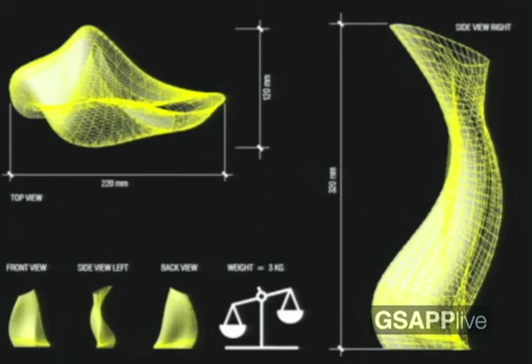With this competition, I was actually told that I had won, but apparently the CEO of Budweiser said it didn't look African enough. I found that quite interesting, that he knew more about an African aesthetic than I did. The winning trophy was actually a drum, very clever, and unfortunately it was never manufactured.

But I thought it would be an interesting way to show you how that notion of aesthetics works, and also how one can question the fundamentals of what is a trophy and try to articulate something different.

And in terms of a jump in scale, a lot of my work, as Marcus mentioned, works beyond the architectural scale. I get involved with institutional structures, essentially establishing organizations, because in South Africa we're at the beginnings of our democracy, so the type of conditions which allow for architecture to emerge are often not there.

This particular project, I was asked to do some eco-lodges using local materials in a very sensitive forest, but quite importantly, we had to use homeless people to actually build the building. So the notion of having strong intellectual capital and how you detail the buildings becomes transformed when you realize you're dealing with people who've never even held a piece of wood before.

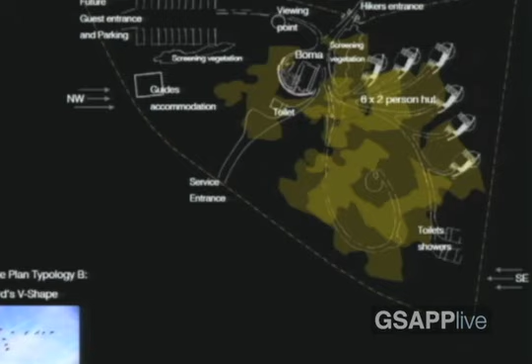So the exercise here, in part, is responding to context, to wind and so on, but I think the real hypothesis and journey is what type of architectural language is appropriate when the people making buildings are at almost zero skill level. This had various implications for the language of the building.

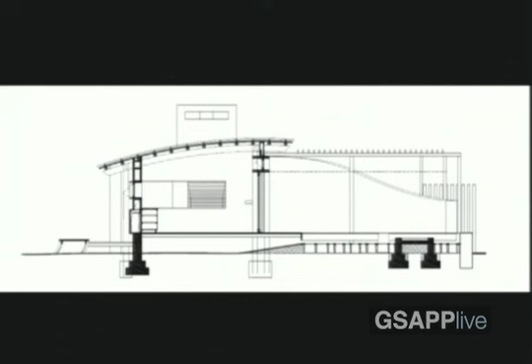The fact that I had to use found materials off-site to actually construct the building meant there wasn't the luxury of me using the sort of typical materials that one would expect.

But I think what was very successful about the project - and that stone wall, by the way, we had to demolish it three times to teach people how to put a stone wall together - it seamlessly fits into its context, and there were sensitive trees that had to be avoided.

So the design methodology of this project was very much one of sensitivity, one of calm.

And I'm quite proud to say that through this project, we trained almost 60 different homeless people who now know how to make a door, who now know how to make a window, and they're able to take those skills elsewhere. So the impact of this project is less about its form and more about its mode of becoming.

My next project is a police station, my first enclosed building, which won an award. I'll tell you why. The police, for various historical reasons, have occupied a very contentious space in South Africa's history. They were often involved as an instrument of the state to repress people. They were not trusted by anybody, and even I, to this day, still have a shiver down my spine when I see police walking down the street, regardless of their nationality.

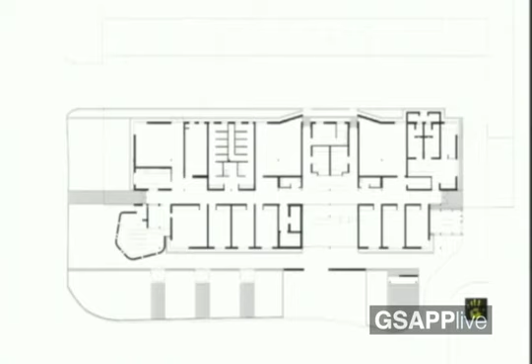Now, this sounds pretty simple. Up until this point, police stations had slot windows so that you could fire out of them. They had brown brick walls so that you can't actually see the dirt on them. Very defensive strategies, and in fact, all of their buildings were fortresses in the landscape. And I said that this building will actually be fragile.

So I'm actually going to make it white so that if dirt shows up, it encourages you to clean it. Second, I'm going to remove all of the burglar bars, which they had on all of the windows, and I would have no fence at the front side. Essentially, I would turn the inside of the station outward and make it a public sort of building.

The success of this project is that it has now informed the national strategy for how all police stations should interact with their setting. Not necessarily the form of the building per se, but really that police stations can become part of their context and can afford to be ephemeral, and in that way show strength, as opposed to showing strength by having a fortress-like sort of architecture.

The staff in this building have loved it. I go there and visit it often. But one of the most intriguing things was when I was dealing with the police superintendent and I was putting in hand-screw taps and so on in the bathrooms.

The police superintendent said, 'Don't give the police nice things. They will destroy them. They're all animals.' And I said, if you treat your own staff like animals, then they will behave like that. Not only that, they will go out into the world and take it out on ordinary people. So I said, let's make a building which brings dignity to the police, because they are a part of our society and they need to see themselves in a different light.

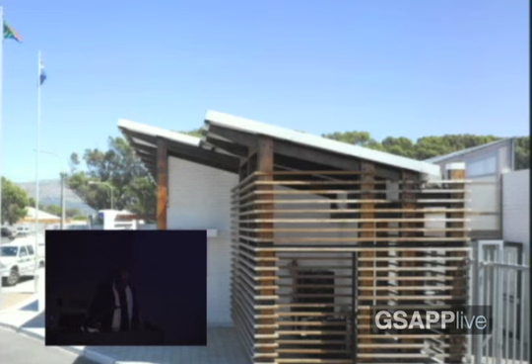This building is a fairly ordinary sort of architectural language, but I think it's quite a departure from the normative way buildings were designed. In fact, people have said to me it looks like an art gallery, it looks like anything else. And I said, well, I'm pleased that the one thing it doesn't look like is the stereotypical image of what a police station needs to be.

The little curved end over there was a smoker's corner and a barbecue facility, a sort of place where the police would get to rest. At the time, there seemed to be no necessity for this, but it's one of the most successful and simple spaces in the whole project. And when last I checked, police persons have been arguing quite a bit to try and be relocated to that particular station.

Greenpoint Stadium is a project which I submitted as part of a competition. I was shortlisted. What was interesting for me about the stadium, and this was for the World Cup, was its potential in terms of what it could offer society, the local society, that is.

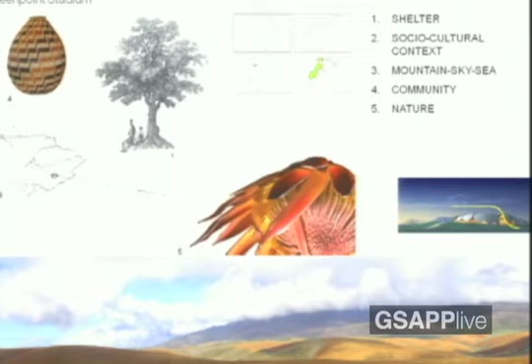What I did is pretty much a hybrid concept. There was a relationship between the notion of a tree providing shelter, again craft in terms of beadwork, but the location in terms of a mountain, sky, sea relationship, and the protea, which is our national flower. The design that I developed, I worked on this with HOK Architects in London, was the notion of a very sort of delicate type of structure.

What was, I think for me, the main purpose of this form is that you'll see the basket at the base. Where the stadium was proposed, there were actually about 5,000 informal traders who used to trade on that site every Sunday, so it was a means of livelihood for them. My urban strategy was to make a stadium around which the informal sector could still find a place.

This opportunity to create infrastructure for 2010 did not mean that we had to displace local people and disrupt the local economy. I was actually quite proud of the design for that social purpose, and for a language of a stadium which doesn't look like a typical stadium. Unfortunately, I didn't win it because I was told the design was too radical.

You might have seen the current stadium, but I'm sorry to say that the 5,000 people who used to trade there no longer trade in that area, and their lives have been disrupted. This relationship between what a building can do for its context and its ethical responsibility in understanding its space economy is lost on a lot of people, and that's a real pity in a place like South Africa where poverty is almost endemic. It's quite important to imagine how architecture can help stave off these sorts of challenges.

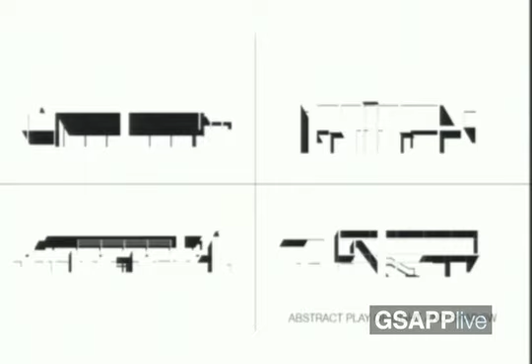So this project started out with a 2 million rand budget, and I made a very strong and impassioned argument about the role of buildings playing a role of legacy and informing the context, and they increased the budget to about 21 million. It's not that I was chasing fees, but it was really about putting enough investment into a building which was meant to transform and support its context.

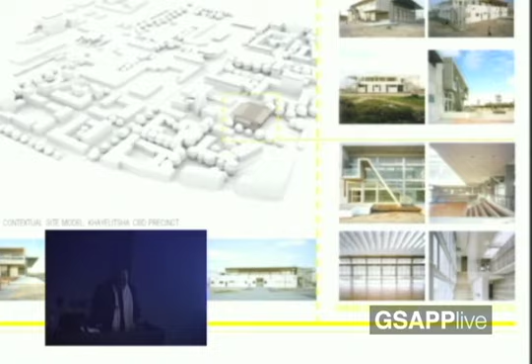The strategy is also quite simple. It's essentially a decorated shed, a sort of box, but the whole front facade actually opens out onto the street, so that the relationship between building and street and public space has far more potential than a closed-off sort of building. The language of the building is uncompromisingly contemporary.

There have been a number of interventions in the so-called township context which have been very cynical and divisive, making arguments for cheap buildings. I think it's quite important that when one intervenes in fragile contexts, architecture should not replicate that fragility, but in fact should be a refuge from the uncertainty of one's context.

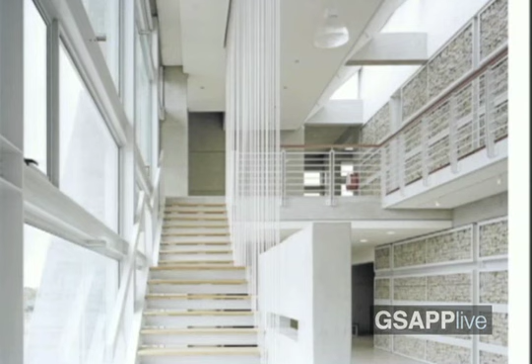These are some of the interior shots of the space. For example, the gabion wall along that side uses a particular stone which comes from Table Mountain, a beautiful natural feature in our landscape. I used Table Mountain stone because in that area, people often look at the mountain but don't have a chance to access it, so it takes on a sort of mythological dimension. I actually had this idea of bringing the mountain back to the people. It's perhaps a strange idea, but the poetry of buildings can mean a lot to people at times.

That's a shot of it shown at the front with the openings. You'll notice there are no roads accessing the building. This is one of my key frustrations about development in South Africa, that it's often very fragmented. The city of Cape Town could not agree to put in a road, so I made a building that was literally standing in a field of dust. These are the type of issues I talk about regarding institutional growth and development that's required, because you have government working in silos and not talking to each other.

But this building has also received a lot of support and respect from the community. It's never been broken into, and it doesn't have any burglar bars. Interestingly, I was shown a whole range of buildings and told the community will destroy the building, you need to protect it. This one has managed to protect itself because it's loved by the people, and I'm actually quite proud of that.

The Ordos project, I was selected to be involved in it, and I won't dwell too much on this, except to say that for me the conceptual conundrum was: how does an African architect intervene in Inner Mongolia, and what is an appropriate form of language and response to context? Do I use this opportunity to further my career and do a signature building typical of what I would do anywhere else, or do I listen to context?

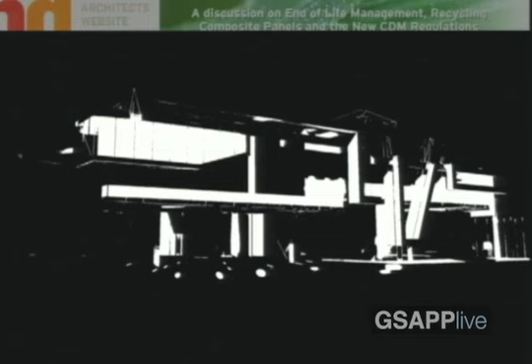I took the latter approach, and I was particularly inspired by, or rather depressed by, the extent to which Beijing's development in the last 10 to 20 years, and other parts of China, have really eroded the Chinese sensibility of urban form and architecture. They have a very particular hierarchy of public and private spaces, and I was intrigued by this notion of a semi-public space which happens within the Hutong courtyard dynamic.

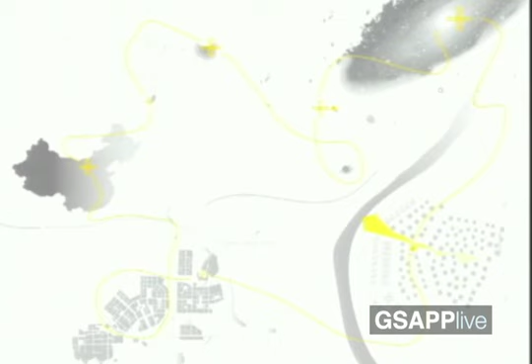So the building that I essentially did was an assemblage of three elements: line, solid, void—basically a series of cubes which interlock together to form a semi-public space within the heart of the building. The idea was to critique this notion of a villa being in the middle of Ordos and not really interacting with its context, but making a building in which the innards actually turn to the outside.

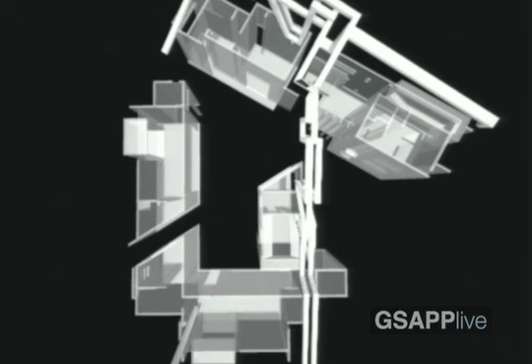It was also highly informed by a lot of Mongolian mythology, and we called it the Palace of the North. I found a very interesting Mongolian poem which takes a whole month to recite, and I analyzed the poem and then abstracted it into the architectural form.

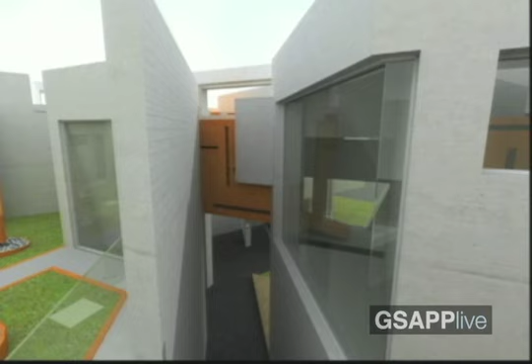I think this project was also quite intriguing because it didn't fit the expectations that certain people in China had about what type of building I would make—the sort of hut references seemed to emerge in these conversations. And I said, no, I'm not going to make a hut. Anyway, this is a shot of that sliver, that canyon between the two buildings, in which the public are drawn into the internal space.

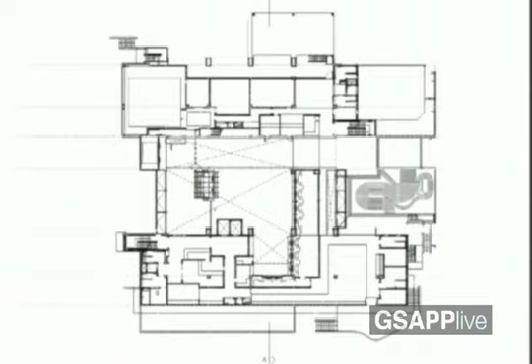The next project is interesting for me because I was asked to do a public transport office building for government. The brief was for it to be the first sustainable building for the state. But what's interesting is the actual tenant. We have a phenomenon in South Africa of commuter taxis, a sort of semi-formal industry which is quite powerful, but also prone to violence and constantly clashing with government.

Similar to the police station, the government had always taken the attitude that this commuter taxi industry's people were animals and not worthy of being treated correctly, and it caused a lot of strife, going back to the 1980s. So I made the argument that we would again make a building in which a taxi driver would feel that they're actually given respect and being part of the community.

So the language of the building, as opposed to what was there before, was deliberately contemporary—large volumes, big spaces—where if taxi people had a debate and wanted to address their grievances, the civic architecture presented would dignify how those grievances are conveyed, expressed, and resolved.

In short, aside from the normative technical issues about making a sustainable building—natural ventilation, looking at heat gain and heat loss and those sorts of mappings—this building was also specifically located in a very poor area.

I don't know if you can see the context, but government wanted to make the message that they believe in people and want to actually respond to the needs of the township. So its setting was quite important. The height was a big issue—it's only seven stories, but it's actually the tallest building in the area.

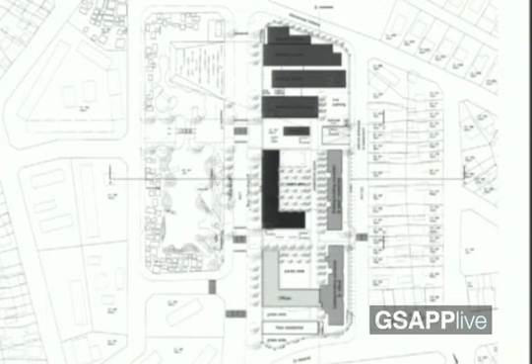So I'll jump back to this image. We've got the museum component sitting here, but this is the whole site. There's a water feature here, a detention pond where currently lots of children drown every winter, which is our rainy season. The intervention was to create the museum but also to rehabilitate this context, and you can begin to see the fragmented language of the informal settlement. In some ways there's a dialogue between the formality of the urban intervention along the side versus the informality and splicing of opportunities across the space.

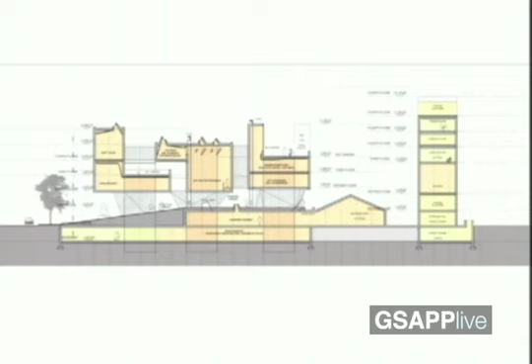The structure of the building is essentially 3 rectangular spaces which interlock in volume, structured according to 3 in terms of height, width, and depth. There's the creation of a sculpture park at the bottom scale, this existing building where Ray Alexander Simons first held her initial rallies, and then a tower which forms a visual beacon in the landscape — how you access the whole museum complex is by coming in from underground.

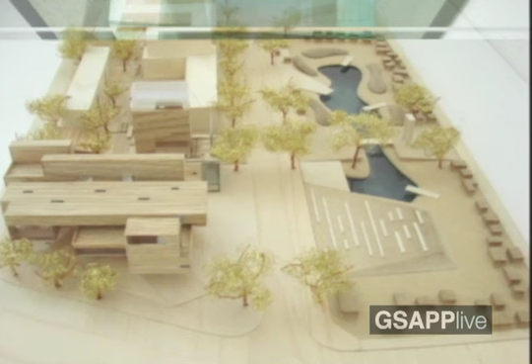The project right now is in its early stages. This is an organization which has never done a museum before, so a lot of the work is not necessarily designing the building, but understanding how to structure a museum, how to structure curatorial practices, what type of institutional vehicle is appropriate, and fundraising. A lot of my work is in that domain because I've realized it's almost impossible to create architecture unless one is engaged in some educational dynamic about what the site can offer.

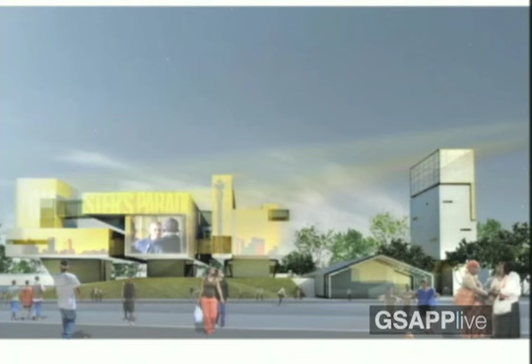Currently we've proposed to the city that this major street, where I mentioned Amy Biehl was killed, would be pedestrianized, with the creation of a park along the side, an amphitheater facing onto the building, and effectively a sort of urban renewal node. The project was launched by the deputy president about 3 months ago, so I'm hoping the fundraising will go well, but I haven't heard much from them at this point.

This is just very initial schematic renderings of the building, which essentially floats in the landscape and creates this alternate terrain beneath it.

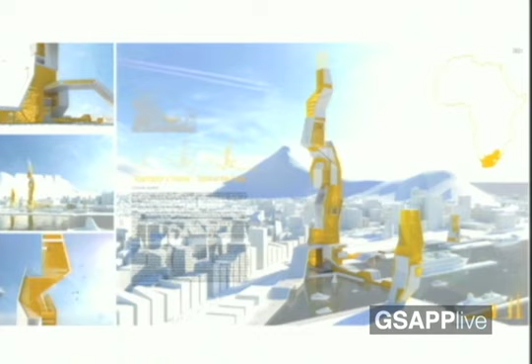Adamastor's Throne is what I call a provocation. On occasion, I think it's quite important to do projects meant to stimulate debate, and one of the debates we have in Cape Town is the issue of appropriate height of buildings. The argument behind this building was to create an ecological tower which would do serious investigations in terms of wind, changing wind patterns, and the rising of sea level.

Adamastor, by the way, was a mythological Greek god who apparently lived at the top of Table Mountain and prevented Portuguese ships from rounding the Cape — that's when the Cape changed from being called the Cape of Storms to the Cape of Good Hope. Apparently Adamastor was defeated when Bartholomew Diaz went around. So there's also a tongue-in-cheek play on the origins of Cape Town and this notion of wind, colonization and development.

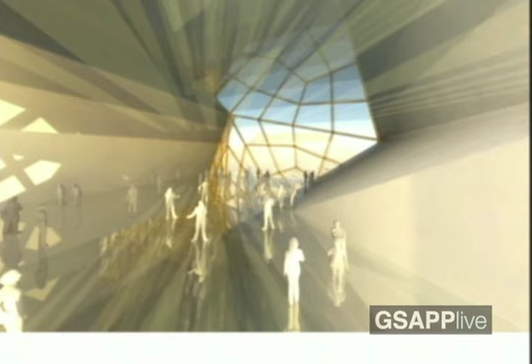This building is deliberately provocative in relation to its context, particularly because I think it's sometimes important to generate discussion and not necessarily be exemplary, but to take a cutting-edge view in terms of what architecture can represent. And some interior shots on that side — apologies for the DPI level there.

There are actually 3 more projects I'm almost done with. The other project I want to mention is one I was asked to do that was quite interesting.

We are beginning to introduce bus rapid transit, or what we call integrated rapid transit, in South Africa. I was asked to put a proposal together for the capital city. One of my key arguments is that the installation of infrastructure, whether it's a stadium or a police station, can play a function that is more than just the engineering need of moving people to and fro.

Essentially the idea was plug and play, meaning all of these bus termini would play a particular function depending on its context. So for example, if in one area you find there isn't a clinic, then a clinic would be attached to the bus facility. If another area had a shortage of libraries or other social infrastructure, that would be attached to the bus facility instead.

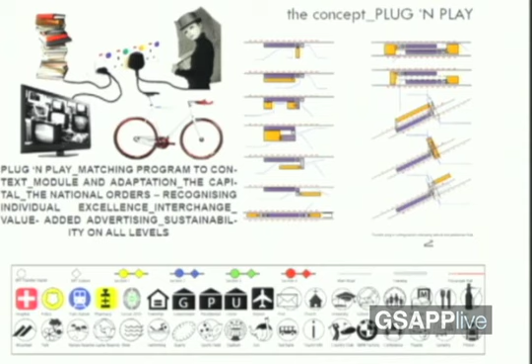This requires that your bus stops are actually on the side of the road as opposed to the median. Engineers prefer the median because it's cheaper, since you have one structure serving two sides. But my argument is that then it plays no urban function. So it might cost more to have two structures, but effectively it has a much stronger impact.

So these are just quick examples of what these could be. This one was looking at adding an ATM with a sort of sculpture park where people could actually climb and do mountain climbing training in the area, charging of electrical vehicles, a bicycle rack, and saying that these can play different functions.

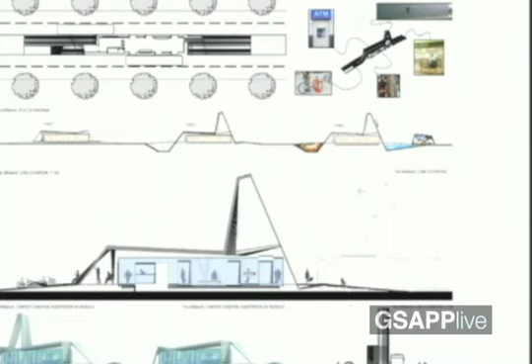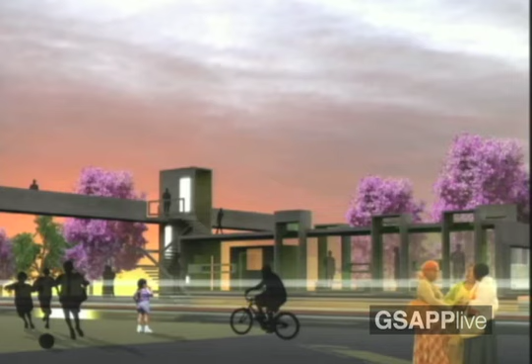The sleeve took on a very different notion where it was attached to a library and also a potential butterfly park, because one of these was located in quite a sensitive ecological area. So all that changes is essentially the scaffolding that wraps around the core structure, this being the basic module, expressed in this sort of fashion or in that sort of way.

I must mention that project, although it received a lot of acclaim from the client because of its urban function, they indicated that it's not their responsibility to solve urban issues, they just want to get people on buses. So for that reason, I did not succeed with the project. But I think it's quite telling, the level of ignorance about how to be strategic with investment, design and capital.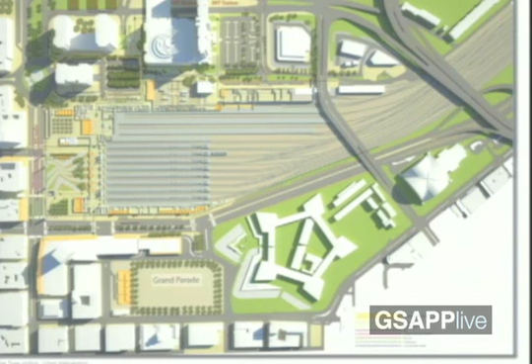Cape Town train station, I think, is particularly one of the projects where I think it speaks to this issue. The real challenge of Cape Town station had a lot to do with its history. Stations and rail have had a very particular role to play in the evolution of South Africa, in the sense that rail was used as a colonial instrument to tame the landscape, in much the same way that the opening up of the Western United States has an intimate relationship with rail.

In the 1960s, it was redesigned, and actually the president launched the building and said it's a shining example of apartheid and how we as a society need to live. Just to give you a sense of what that was, there was duplication of everything. There were double lifts, lifts for white people, lifts for black people. There were trains for black people, so the whole infrastructure was duplicated.

What I thought would be quite interesting in terms of transforming the station with regards to 2010 and a post-1994 sensibility was to look at how do we make this place into something special.

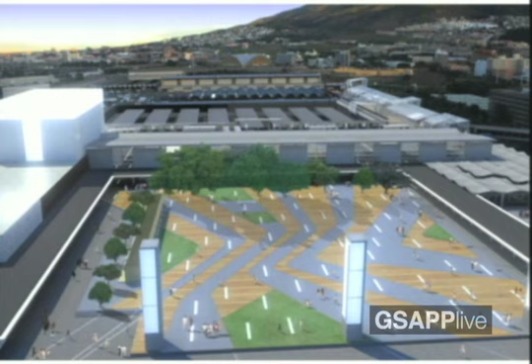The crime levels at the station were quite high, but because people don't have access to cars, they had no choice but to go through this facility. So there were a number of challenges in terms of transforming the project. The first urban intervention was fairly mundane, so to speak. It's really about reclaiming the relationship between the city and the station by making a new sort of public space.

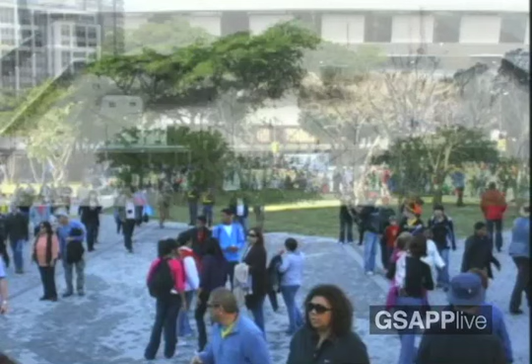You can see the value engineering that popped in there, so some of my detailings have changed quite drastically. But what's fascinating for me about this project is that these are shots of how the space is used now. It's been totally transformed from a derelict spatial condition into one in which people gather and have spontaneous interactions. That's what interests me about good architecture, when it creates the potential for new interactions to emerge.

When we had our World Cup event with the stadium in the background, there was a very interesting dialogue between the station and the stadium. We had the only fan mile in the whole country where literally the whole city came alive, and there were parties happening along the route and particularly at the station.

This is a shot of an event that happened in that same space fairly recently, and I show this image because I think it's such a sharp contrast. Now it's become a place of gathering, a place of social interaction, a place of celebration, whereas before it was a place of oppression and a place of negativity. And the architectural intervention in terms of materiality is actually quite minimal—just a few key gestures about how you define the space.

Internally, I had a number of challenges looking at particularly the way that the space was structured. There was poor lighting, there were informal traders all over the space, so visual access was quite difficult. There was no signage or advertising strategy, and the space was not compliant in terms of emergency evacuation. So I had to develop a design in which all of these problems could be dealt with.

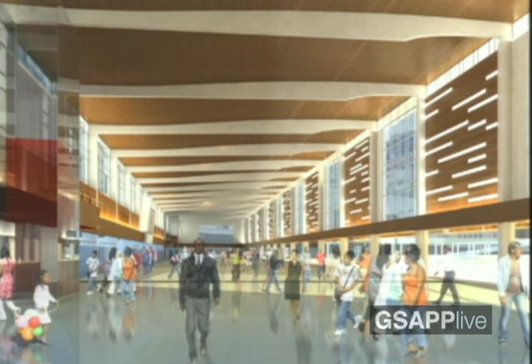And the solution was quite simple: open the station up to the city, change the glazing, relocate the traders to a new trading market. Essentially, again, have a relationship where as you come off from the trains, you can almost see the city as soon as you arrive. So your sense of journey is that you don't get off into a train, into a dark space, and then back into the city, but you have a seamless transition.

I think this is probably one of the more successful spaces in the city. People actually come to the station to linger, whereas before that wasn't the case—people wanted to get out of the station as quickly as possible. They've had photo shoots inside there, they've had people gathering, hanging out, and without doing any major changes to the overall skeleton or envelope, the space has become far more amenable to being part of city life. And for me, if you knew what this was like before, trust me, you'd be as excited as I am.

We were able to accommodate the event also, which was one of my specific briefs, to make sure that we meet all the compliance conditions of 2010. Informal traders—I showed you that strange trading unit—I designed a new one that would be used within the main concourse. It's essentially a sphere that closes up and down.

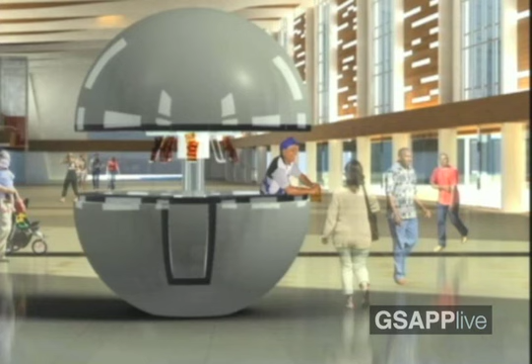This is partly to do with the clearing of sight lines, but also that when these are shut, they also remain like pearls within the concourse space, so that you don't leave it to chance the way in which informal trading begins to interact within the main concourse.

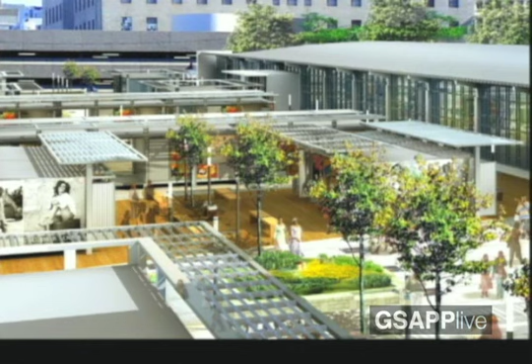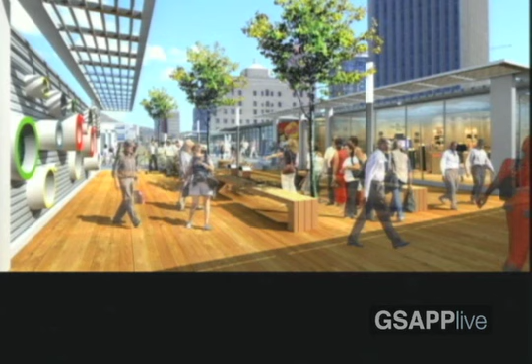So what I proposed—I worked with an advertising company, and we generated a model together where we demonstrated that through advertising, because of the foot traffic you get to the station, we would be able to reduce the amount of capital the individual trader would have to put into a trader unit. We decided to make an environment in which the traders would be able to trade with more dignity, with storage, security, signage, and actually transform quite a derelict space into a new sort of public realm.

This also went through quite an extensive public participation process with about 300 different traders, and numerous presentations discussing and workshopping the design intentions with them. So these drawings are not the architect working in isolation, but there are processes that inform it.

And then lastly, at what I call the XL, or the large scale, I've been asked to do a vision for Cape Town Station in the year 2030, and my main brief was to put in the first underground in Cape Town. So whereas I had a 2010 brief, I also had a 2030 brief.

One of the key debates we were having was how do you model a city in the year 2030? Given that most stations are refurbished on a 70-year cycle, the design I put in now would need to be robust until the year 2100. So appropriate densities, particularly from a population perspective and the nature of the economy, became critical, because a lot of people in Cape Town were comfortable with current densities. But we had to demonstrate that current densities are unsustainable from an economic perspective, and that you need accurate forecasts to scale this project.

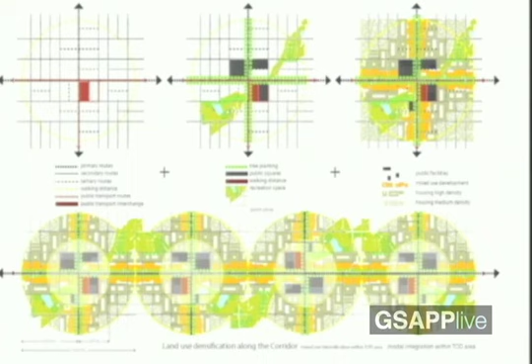So I developed the notion of the TOD, transit-oriented development, and applied it onto the site. It's TODs, obviously, it's international knowledge what that is. But this was also quite transformative, because for the first time they realized that rail infrastructure is an opportunity for housing, an opportunity for urban densification. So whereas before rail was simply seen as movement, now it has a different role.

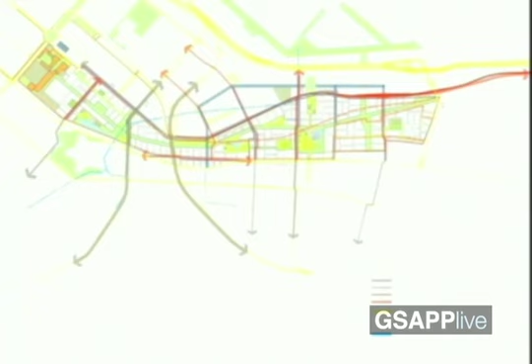Through a series of mappings where I looked at historical urban spaces, cycling routes and so on, I proposed a new network which would effectively stitch the city together, because this piece of land, about 58 hectares, effectively divided the city in two, causing implications for urban growth and development. Integrating it with transport infrastructure, sewage, utilities, etc., was all part of the brief.

With the densities I predicted, I managed to squeeze in about 45,000 extra people into the city. If you remember, I spoke about the eccentric nature of Cape Town, with people on the periphery and not in the core - this was an opportunity for people to have close living in proximity to where they actually work. So the project was not just an exercise in urban densification, but also had a polemic dimension in terms of bringing people previously displaced from the city back into the CBD.

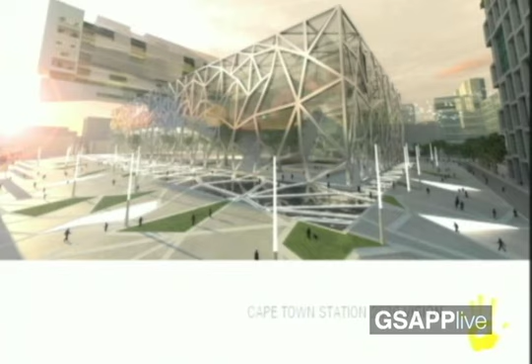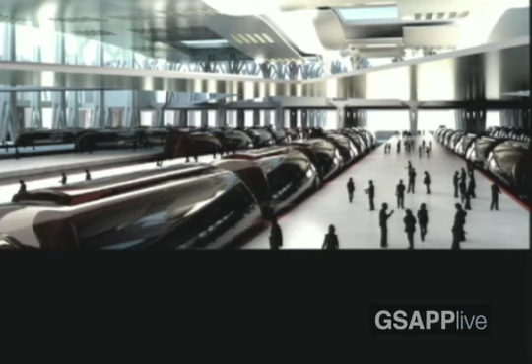This was just a speculative sketch I had done where I'd sunk the train station underground with a transport museum above, on the actual site. A very early schematic shot of what it could potentially be like in the underground. We went through all the processes of geotechnical issues, etc.

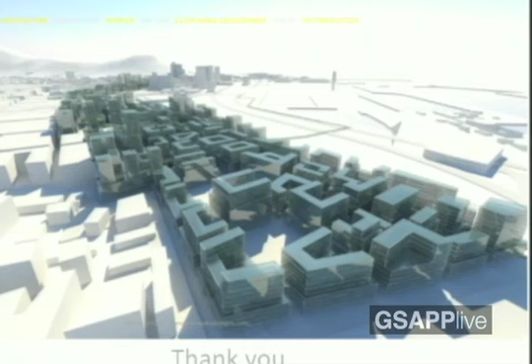Then these are the massing diagrams where I was particularly looking at two phenomena. One is the relationship of how wind would change in the year 2030 because of climate change, which began to influence the form of the buildings. The other is the more normative, urban-planning-friendly massing model. And there were a whole host of other permutations.

And at that point, I would like to say...

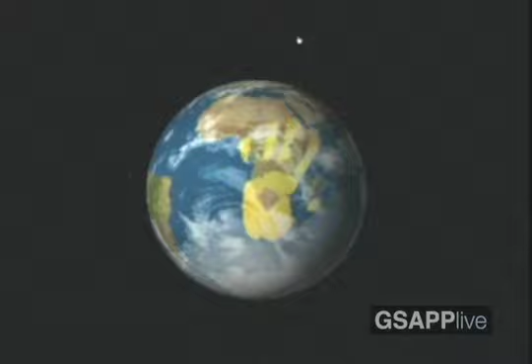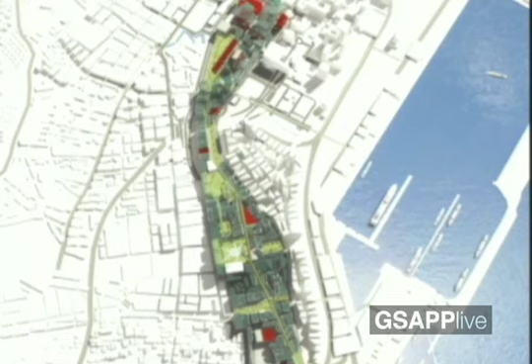Connected Cape Town is an integrated mixed-use development that seamlessly connects public transport modes, serviced by the full range of low-carbon-intensive transport modes, with particular emphasis on light rail, tram and electrical personal transport, tailored towards the needs of the pedestrian. Connected Cape Town is typified by its iconic and vibrant central spine, which not only plays host to a real 24-hour lifestyle, but is a major contributor to the biodiversity of the CBD, and offers a range of historically informed public spaces, blending culture and public space making.

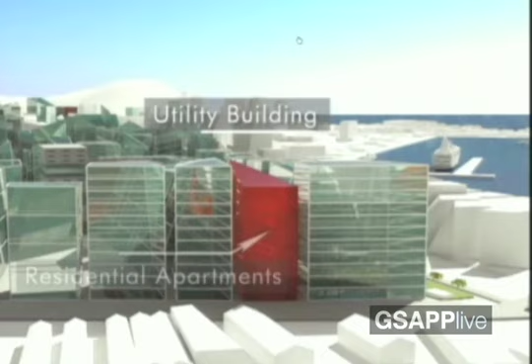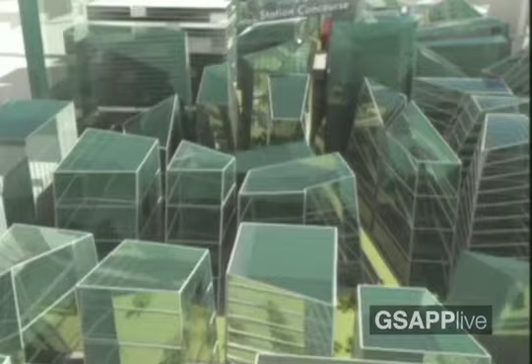Boarding a train, we enter the Health and Wellness Precinct, Neighbourhood D, housing a fitness park, a public swimming pool, and squash and tennis courts. This precinct offers residents an opportunity to care for their bodies and well-being as easily as they would their economic well-being. Clinics and healthcare centres are complemented by open spaces, a research centre, as well as high-density housing. This creates individuals and communities at work and at leisure who are informed by a value system of mutual respect and human solidarity.

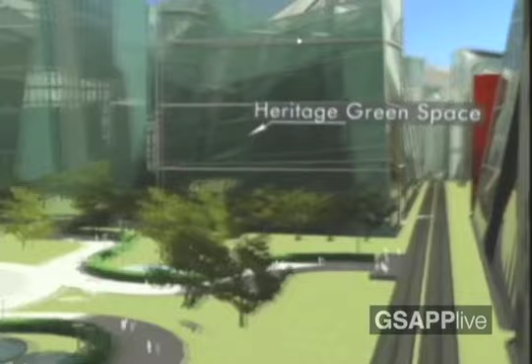Using the many forms of sustainable, pedestrian-friendly transport available on the site, one enters Neighbourhood C. Dedicated as a service precinct, Neighbourhood C offers government services and social services such as paying municipal bills, and daycare and kindergarten respectively. Beautiful recreational spaces and government staff housing make Neighbourhood C a friendly, relaxing and efficient destination.

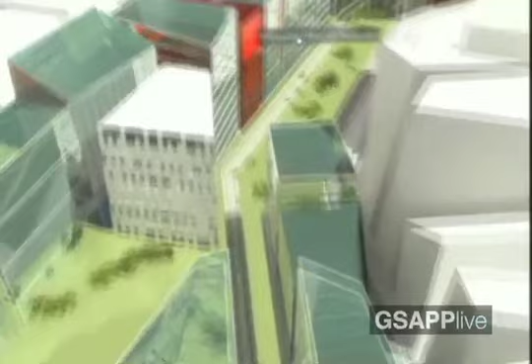As we move into Neighbourhood B, we enter a site of innovative technical research and education. The spirit of the entrepreneur thrives here, with restaurants, cafes, stores, a food market, and various forms of micro-industry. Complemented by a fire station and a resource centre, Neighbourhood B is an incubator of economic and technological advancement.

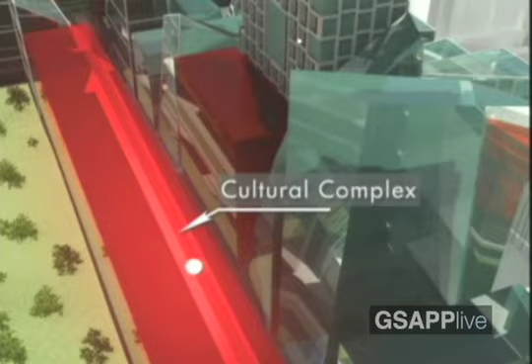Neighbourhood A, which lies at the heart of the CBD, houses a cultural complex, a museum, an art gallery, and a memorial park, in line with emphasising the heritage significance of the site. The neighbourhood is also home to the Department of Home Affairs, the South African Police Service, law courts, financial service institutions, as well as high-density urban housing.

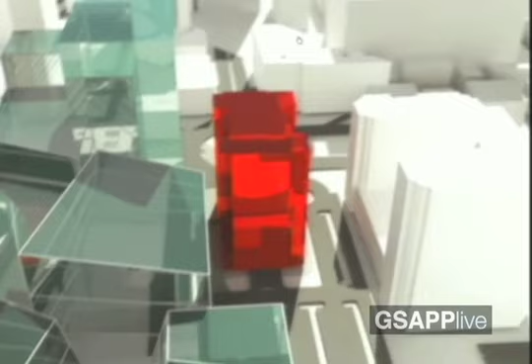The seamless integration of the precincts, underpinned by various and diverse transport modes, serves as a connection between our past and our future. A connection between mountain and sea. A connection between rich and poor. A connection of ideas and dreams. It is a place for all, leading the way in an equitable Cape Town. A just Cape Town. A vibrant Cape Town. Welcome to Connected Cape Town.

Just one caveat: that commission was essentially an urban planning presentation. It wasn't an architectural project, so the architectural resolution is deliberately ambiguous. It was more about the planning and infrastructure approaches to the site.

Do you have any questions? Is that a good or a bad thing? Yeah, I have a very specific question.

When you were talking about the police station, and when he said that they would break the faucets - how do you convince the client, or in this case the head of the police, who actually knows so much about his force, that no, this is a good thing and it will change? How does that conversation take place, and how do you convince someone like that that this is not actually the best thing?